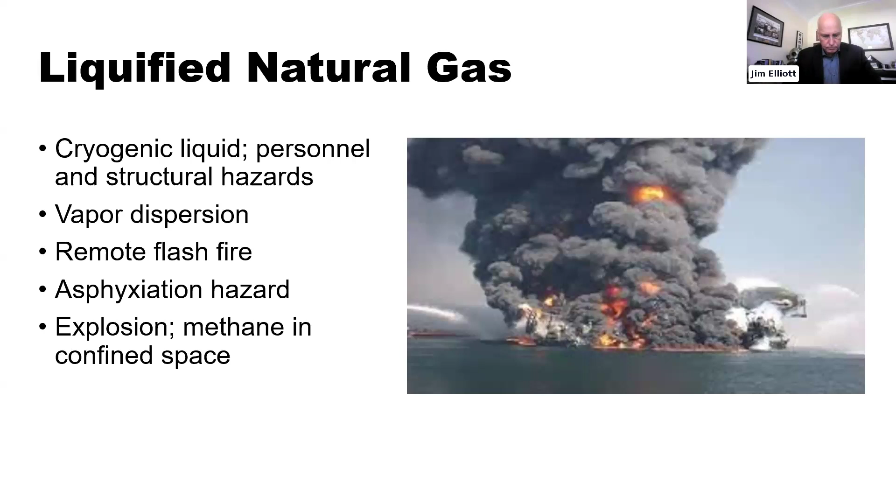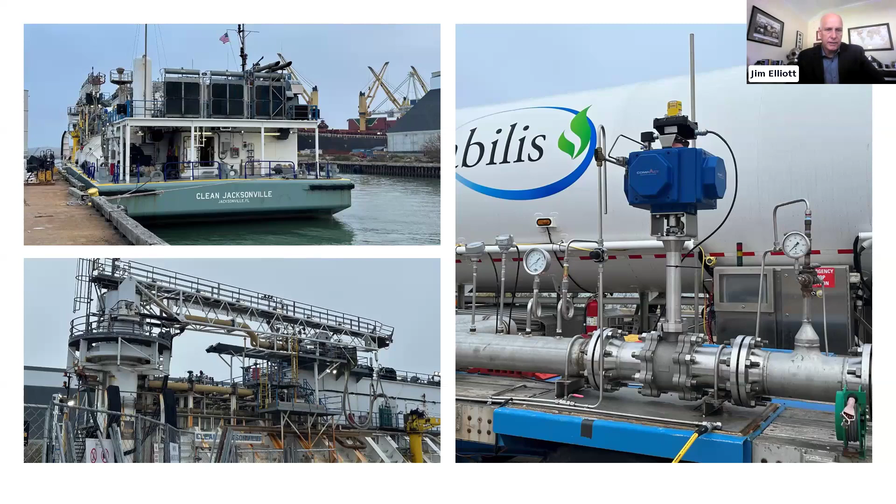So this is probably the most common and refined form of alternative fuel. But with that said, this is considered a transitional fuel because it doesn't meet the net zero goals of greenhouse gas emissions. Another type of fuel is methanol.

Maersk, one of the largest container ship companies, now has a vessel that is propelled by green methanol. Methanol can easily ignite and poses a unique hazard because the vapor density is heavier than air, so it'll go down into low-lying areas and into confined spaces. It can create explosions. It's also a toxin, and interestingly, it retains its flammability even with a high concentration of water - 75% water, 25% methanol can still be considered flammable.

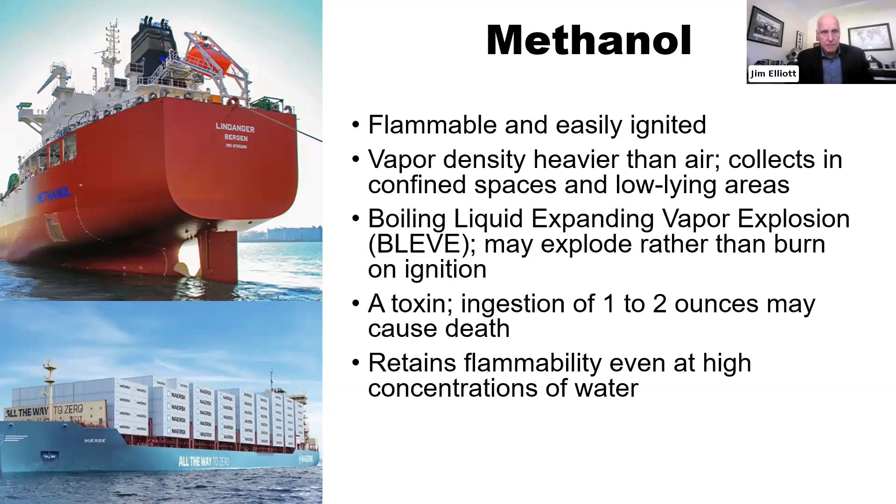These types of ships are already being used in international trade. Here's an example - this is a few shots from a methanol bunkering operation in the Houston area.

Electric vessels, while not a fuel, are a power source for propelling vessels, mostly smaller vessels like tugboats. This is an example of a battery-propelled tugboat, the Green Diamond, based in Houston. And I know most of this audience is from the Great Lakes - these batteries or electric vehicles are being transported, say, over ferries across the lakes.

So most people know about the hazards with lithium batteries, but there are multiple. You have a fire hazard, because these batteries can go into rapid self-ignition called thermal runaway in confined spaces. It produces toxic gases like hydrogen, which can cause an explosion, and these gases are also toxic to responders. There have been studies, for example, with firefighters, that within their PPE, their bunker gear, these toxic gases absorb into that and continue to cause hazards. And these batteries may have residual energy, so trying to open up a battery bank can be a very hazardous condition for responders.

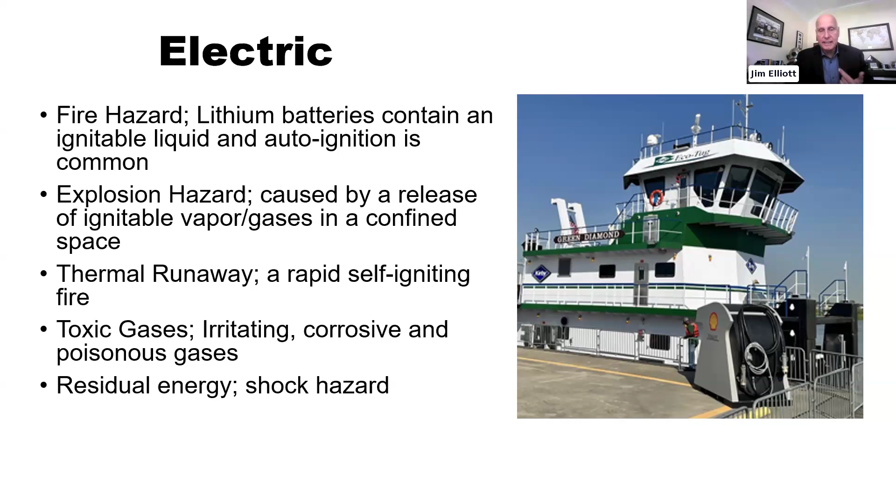The fires are described as quick, violent, and difficult to extinguish.

These photos are from a ship that our company responded to in Alaska. It was carrying about 192 of these large banks of lithium batteries for industrial energy use, called industrial energy segments. 45 of these broke away in heavy seas, and as you can see from the photos, there was combustion going on within the cargo holds.

It was a very dangerous condition for the crew, because there were two cargo holds. One of the cargo holds they extinguished with a fixed CO2 system on board. When the other hold caught on fire, all they had was the water from their fire pumps.

So we went on board and managed the situation and ultimately helped repack all these damaged batteries and got the vessel safely underway. But it was pretty intense for a little while as far as the stress level, because we didn't know if it was going to continue to ignite.

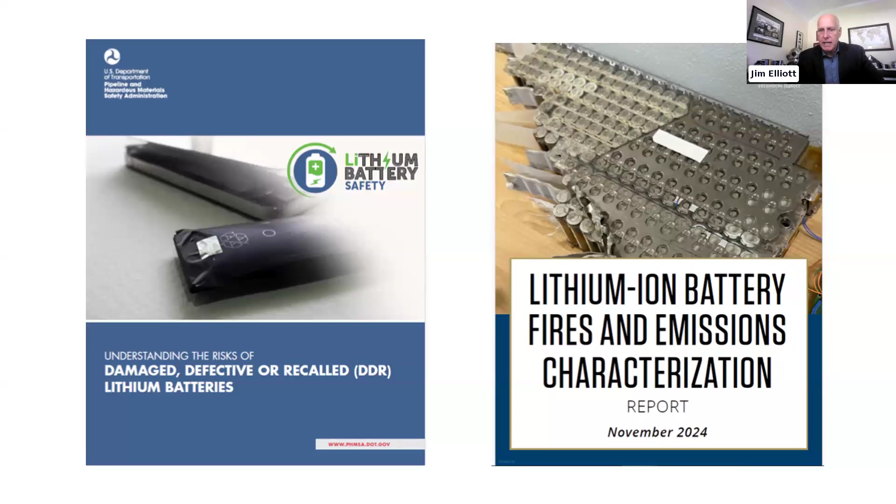So these batteries can be very hazardous. There's a lot of new documents out just the past couple of years. The Pipeline and Hazardous Materials Safety Administration, PHMSA, has a document out on the hazards involved with damaged, defective, or recalled, called DDR lithium batteries. Texas A&M recently did a study on the hazards to responders. And even the Coast Guard just earlier this year in April produced a document from the Research and Development Center that discusses the hazards. The concern is once these lithium batteries go into thermal runaway, it's very, very difficult to put them out with standard marine firefighting practices.

Another type of alternative fuel is ammonia. Ammonia has been transported for years, for example fertilizer for the farming industry, but it poses unique hazards. It's very toxic - death may occur at less than 1% by volume. It's flammable, it's very corrosive, and it has lower density than air, so it will collect in low-lying areas.

The positive thing with ammonia, I would say, from a greenhouse gas perspective, is that ammonia and hydrogen address the concerns with limiting the volume of greenhouse gases. I think China just this month announced they have the first demonstration of an ammonia powered vessel, and there are others on order. So it's an evolving industry with ammonia fueled vessels.

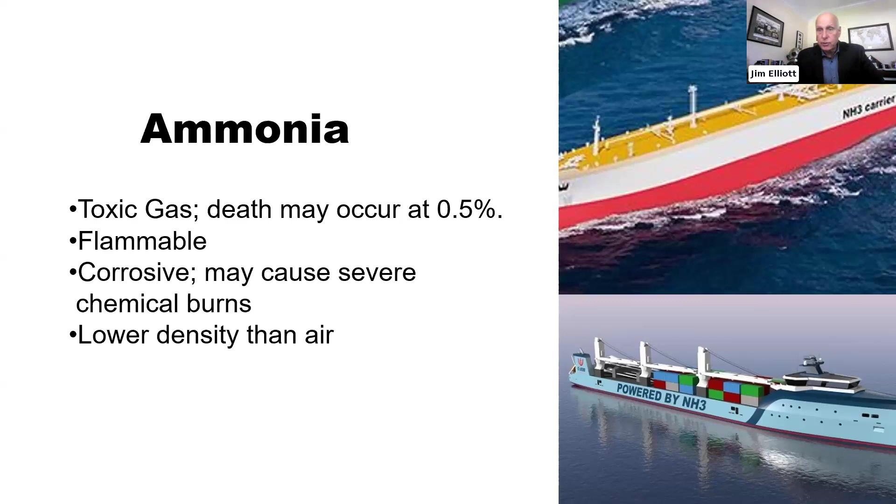But again, it wouldn't be the first time that we've responded to ammonia. It's just that it'll be in higher volumes because it's not comparable to oil in terms of energy, so you have to have a larger volume of fuel on board for ammonia to propel the vessel.

Hydrogen, another type of alternative fuel. This is pretty unique - it displaces oxygen, so it's a suffocation hazard, extremely flammable. So responders have to wear anti-static PPE, along with most of these in self-contained breathing apparatus. It's extremely flammable and it can explode under pressure.

Interestingly, it's difficult to contain even a small leak from a hydrogen release. So oftentimes it may be better just to allow the leak to burn, as opposed to try to put it out and then have that hydrogen continue to expand and find another ignition source.

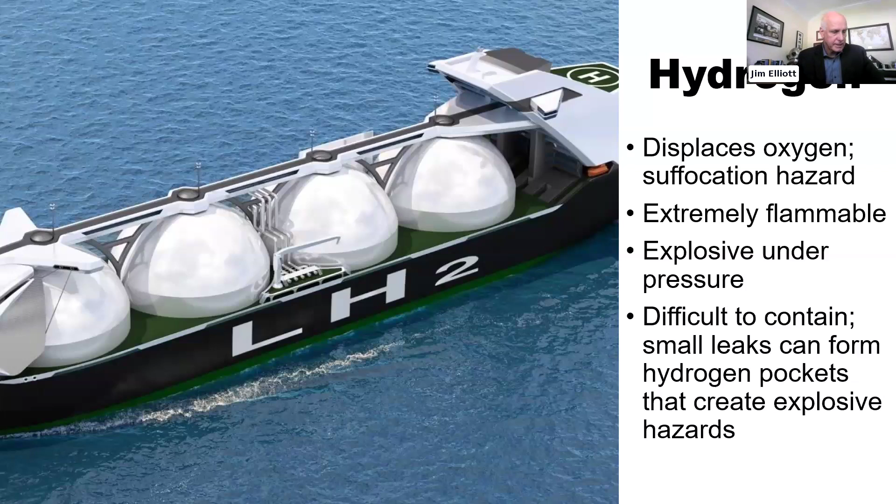It was built around 1958, deactivated in 1971. So there's a lot of issues with nuclear. You probably won't see this on the Great Lakes anytime soon, but it would pose a whole different set of emergency response standards, different types of organizations not typically found in a unified command for a vessel, which would typically be the Coast Guard and the state involved. It would involve the Department of Energy, Nuclear Regulatory Commission, and others. And the responders, like the ship's crew, would have to have specialized training in nuclear response.

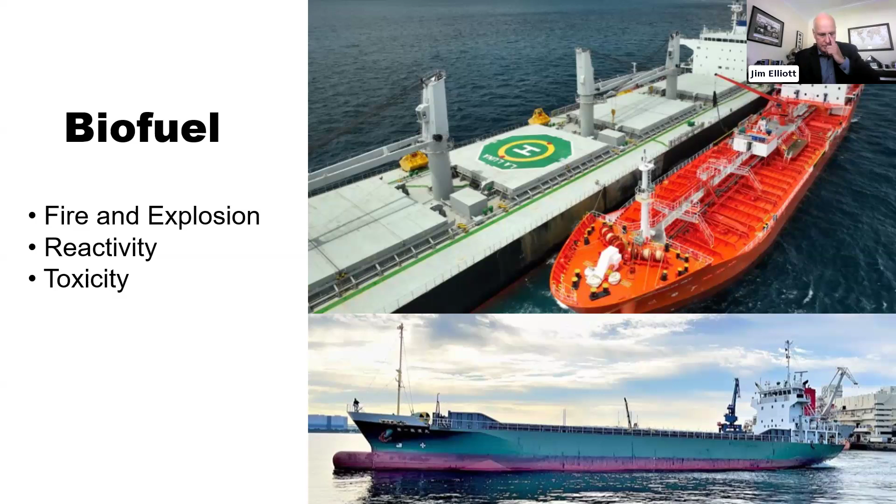In the Great Lakes, if you're interested, in March 2024 there was a study produced on the feasibility of future energy options for Great Lakes shipping. It noted that the majority of greenhouse gases in the Great Lakes from the maritime industry is produced by the bulk carriers, as you can imagine, and then roughly 30% is produced by the tugs. Moving cargo around the Great Lakes is a big industry, it employs a lot of people, and it's something that will be looked at moving forward. So it's already under discussion.

So with that discussion of the unique hazards posed by proposed alternative fuels, I want to briefly discuss how marine casualty response works in the U.S. today.

You can read these quotes. These quotes are from the National Contingency Plan, 40 CFR 300, which lays the foundational concepts for response. It says that safety of life is always the top priority during every response action. After that, the goal is to stabilize the situation to prevent it from getting worse, whether it's a fire, grounding, or collision. Then defensive actions shall begin as soon as possible to prevent impacts to public health or welfare and minimize impact to the environment.

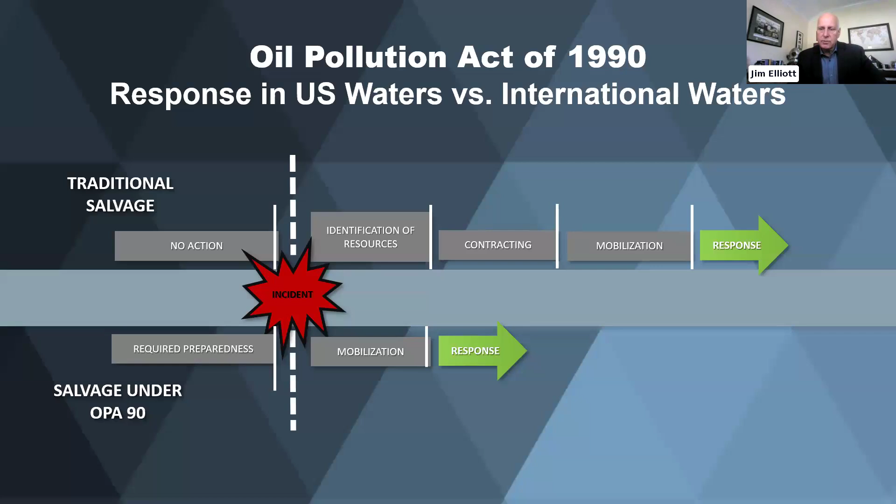The issue with alternative fuels is that because the applicability is only for Group 1 through 4 oils, there's a question as to where these alternative fuel vessels would fall into this response framework.

I'm just going to show you a visual of the way the salvage and firefighting regulations are set up. You can see 19 services that are required, from remote consultation to towage to diving to lightering, which is removing the oil from the vessel.

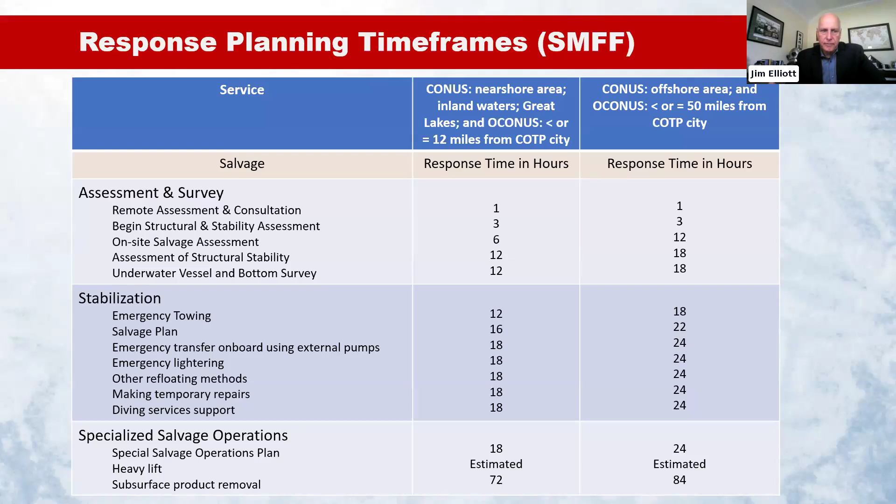So, for example, in the Great Lakes, you can see the timelines there. These are planning timelines that the owner operator and the salvage and marine firefighting service provider have to show the Coast Guard they can meet in terms of hours to respond. So just one example: for emergency lightering within 18 hours, we should have all the equipment to pump off the largest oil cargo tank from the vessel.

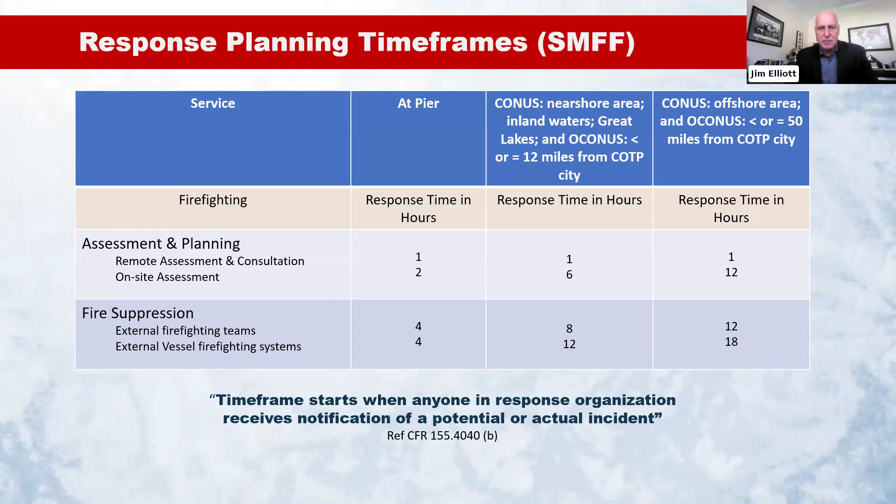Firefighting, our standards are much more stringent, and I know Kelsey is going to provide you some documents afterwards. I'd be happy to share these regulations with you, and you can call me anytime if you have any specific questions about that. And I know there's going to be some question time in just a few minutes.

So with that, I'm just going to discuss six recommendations based on my experience, both in the Coast Guard and now as a contractor, responding to marine casualties.

First recommendation: emergency responders and the salvage industry should be involved in the maritime industry's safety-by-design process. The concept of safety by design incorporates the prevention of health and safety impacts into the design and construction of the vessel. My experience with alternative fuel vessels is that they come into a port, and then we go on board to evaluate how we would respond, and we always have a lot of recommendations on how to improve how that could happen based on our experience. I think it would be great if responders were included in that, to begin with the end in mind.

Within the Coast Guard, in marine safety, there's two primary groups: prevention and response. The prevention folks do plan review for new construction of vessels and give regulatory interpretation for design, while the response side responds when things don't go as planned. So my goal would be to bring those together from the first concept of building a new alternative fuel vessel.

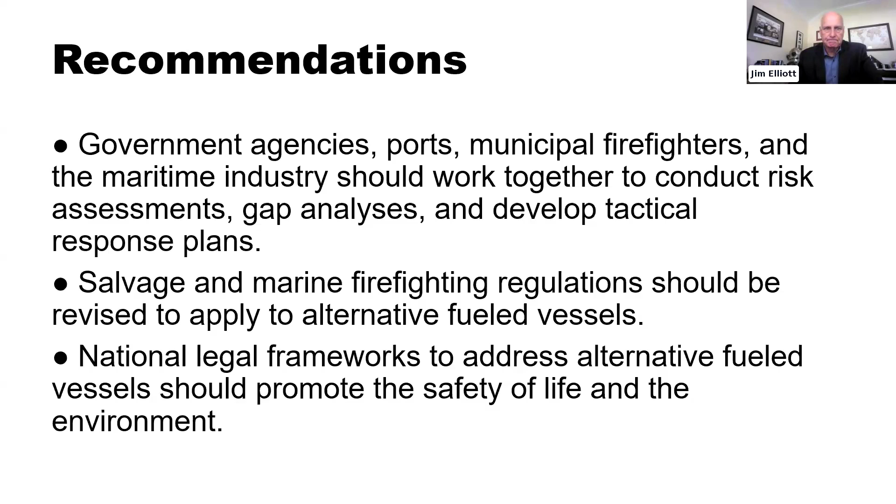And finally, I'll leave you with a quote. Something to think about is that in initial response, there's a lot of unknowns. Typically the response happens in the middle of the night. You don't have all the information, and there are unique challenges to each one of those.

Since at the moment an emergency response is required, there is no time for extensive research. I like this quote - there's an old saying that you should never exchange business cards in the middle of the night during an emergency response. This is it, and I'm trying to do my own research, I have my own interest in this, but the time for extensive research isn't when an emergency is happening. It's beforehand, so that we're all prepared to respond.

So with that, I think I've met my 30-minute timeline. I look forward to your questions.

Thanks, Jim, that was an excellent presentation. I really appreciate it. We've got a couple of questions here, and I'll take them as they were put into the Q&A. This one's from Geneva: what's it like on the inside of a salvage company that needs to be ready for rapid emergency response? Is there a large pool of employees on standby, ready to deploy to incidents in a given radius?